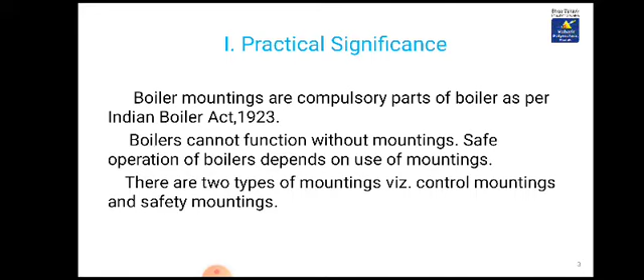In this practical we have the significance of it, as boiler mountings are compulsory parts of boiler as per Indian Boiler Act 1923. Boilers cannot function without mountings. Safe operations of boilers depends on use of mountings. There are two types of mountings, which are control mountings and safety mountings.

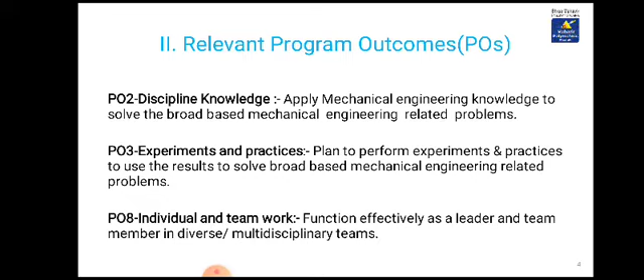Relevant program outcomes: PO2 discipline knowledge - apply mechanical engineering knowledge to solve the broad-based mechanical engineering related problems. PO3 experiments and practices - plan to perform experiments and practices to use the results to solve broad-based mechanical engineering related problems. PO8 individual and teamwork - function effectively as a leader and team member in diverse or multidisciplinary teams.

Relevant course outcomes: use relevant steam boilers. Practical outcome: assembly and dismantling of boiler mountings.

Here we have the minimum theoretical background, as different mountings of boilers mainly include safety mountings like safety valve, water level indicator, fusible plug, pressure gauge, and control mountings like feed check valve, steam stop valve, and blow off cock. Maintenance of these boiler mountings is important for safe working of boilers.

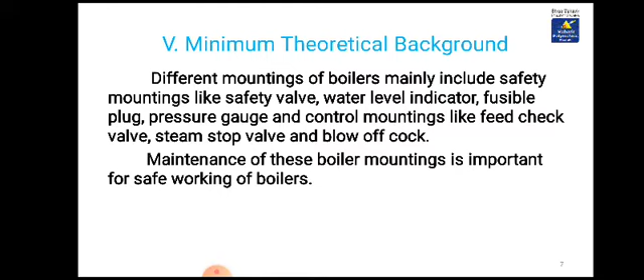Now we have a setup of model spring loaded safety valve. This valve consists of valve stem, casing, coiled spring, threaded bushing, lever, hood, and cotter pin. Now we will see the actual spring loaded safety valve.

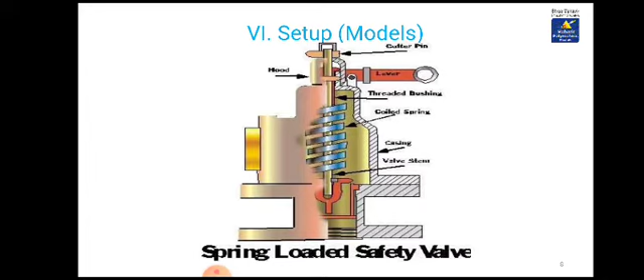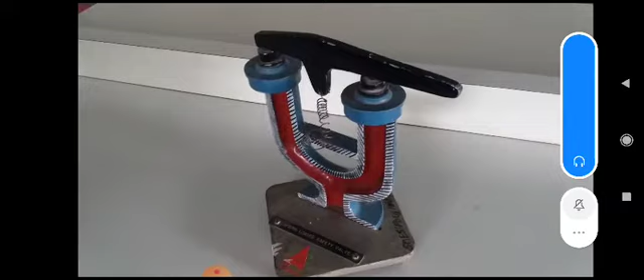Boiler mountings are the compulsory parts of the boiler, and these are used for the safety purpose. Now, one boiler mounting is the spring loaded safety valve. Its construction is like this.

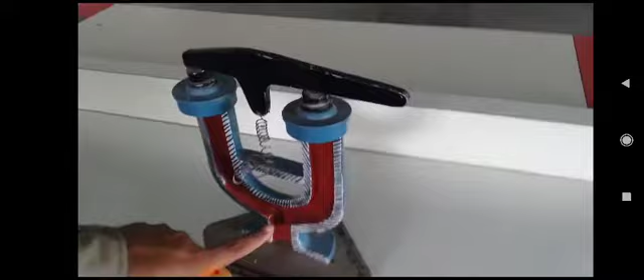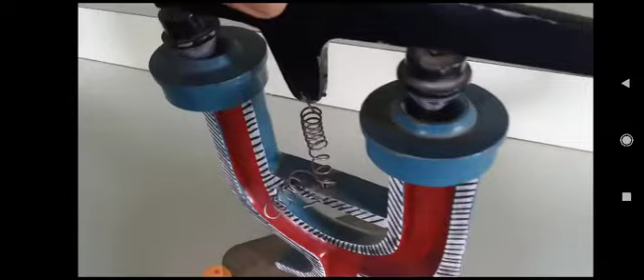The steam enters from this pipe. It branches into two pipes. When the pressure of the steam exceeds the limit, which is beyond safety, this valve will get open, and after some time the exceed steam will move outside from this gap. After some time, when the limit is under control, this valve will get shut down and the steam will be in the boiler.

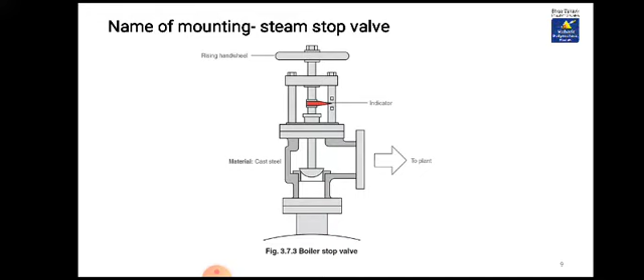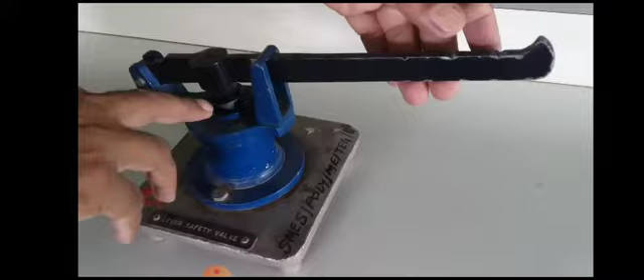Next is the lever safety valve. This valve can be operated manually. Here it is the lever. With pressing this lever upward, we can get the gap and the steam will move outside from the gap, and after we have to shut down it, the gap will be closed and the flow of the steam will be closed.

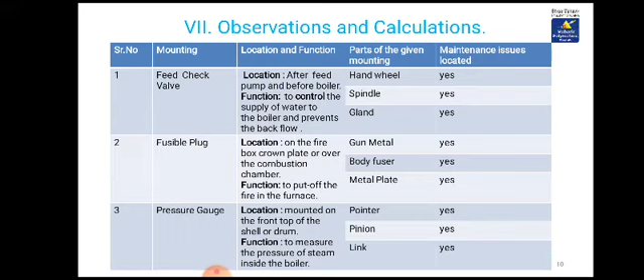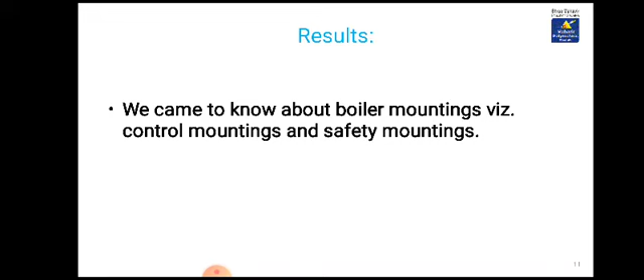Results are, we came to know about boiler mountings, which are control mountings and safety mountings. That is, some are used for control and some are used for safety purposes. Interpretation of result was, we came to know about location and function of mountings. Conclusion is, mountings are necessary and essential for operation and safety of the boiler.